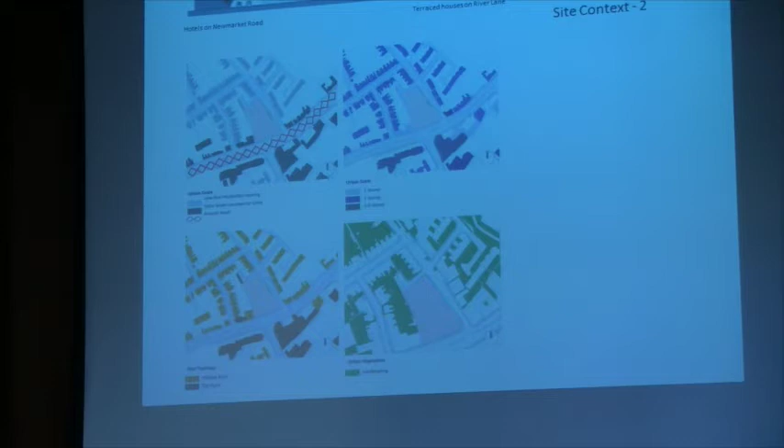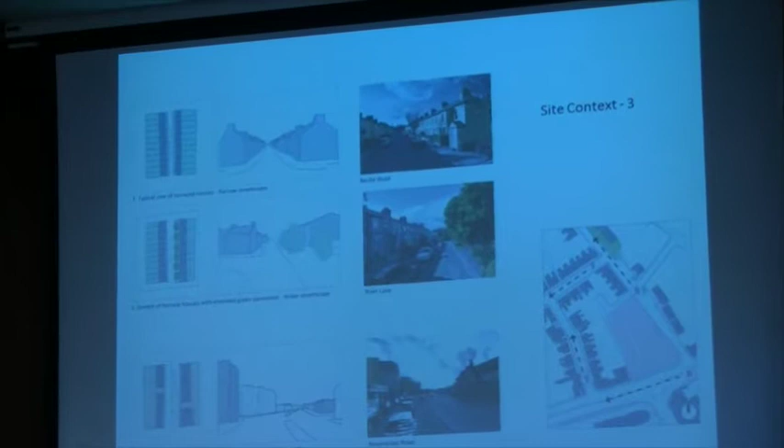One of the key features of the housing was two-storey houses, pitch roofs, front gardens with an entrance gate on the boundary. So we thought that was quite a good motif for the scheme on River Lane itself.

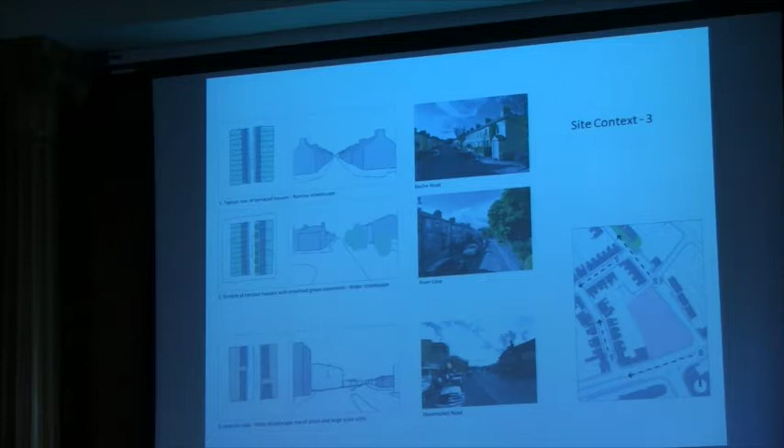The bottom end of River Lane is slightly different in that it's tree-lined. It's quite mature tree planting, as you can see, leading down to the river, which we thought would be good to move right up to Newmarket Road. On Newmarket Road the character changes completely with the hotels and more commercial uses.

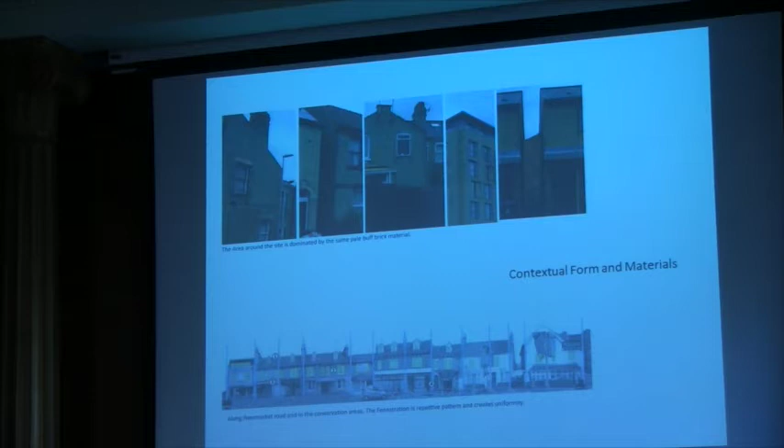That's an extract from the planning guidance. The one thing that links these quite different contexts is the material: Cambridge brick and Cambridge cream. We thought from a very early stage that we should stay with that material and allow it to link these two disparate contexts.

The other main points we tried to respond to in developing the design: we thought the building mass should be split up. This enabled us to respond to the changes in site levels, because the site drops. The high point is up here, and it drops about 600 to 700 mil, over half a metre, down to the bottom end of the site. Splitting it up allows us to push the building down.

It also allows the feel of these two blocks to be quite separate, and for the block facing Newmarket Road to be different and respond to that context.

We're showing new planting, modifying River Lane itself to provide additional parking. We're also creating build-outs with tree planting so we can get quite large trees to carry this tree planting idea right up to the corner, because part of the planning guidance was that the corner of River Lane and Newmarket is a kind of gateway into the residential area behind the site.

Pushing the building back addresses a lot of the issues of the previous refusal. One problem was this continuous frontage being a bit dominating. Apart from the language the previous scheme used, it was too close to the pavement. Pushing it back allows us to get tree planting in the street, front gardens to each individual block, and a series of entrance gates along River Lane.

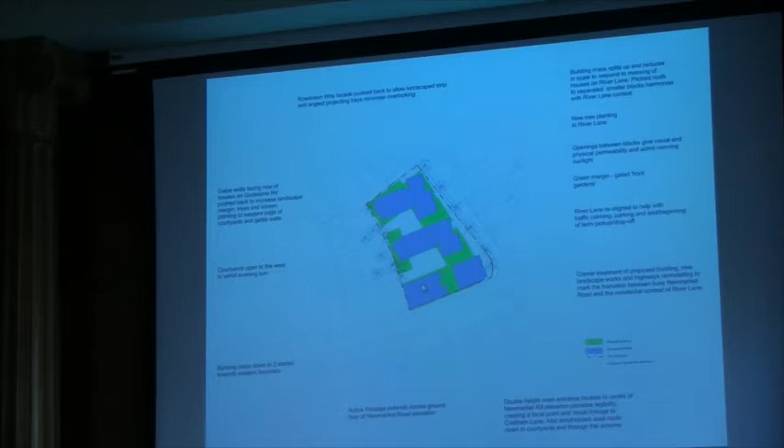At the moment there's a continuous wall - West Garage has a wall on that boundary. It varies in height, some flat parapet, some with a pitched roof, but it's basically a continuous brick wall. The previous scheme had a two-storey block that followed that boundary. We thought it would be nice to break that, to let light into these courtyards, but also to break this long brick wall in terms of residents next door.

The way we set the scheme out - this is obviously Newmarket Road. So the active frontage, we've got a management suite here, which addresses both the entrance, a double height entrance, and the corner into River Lane.

There's a student common room, which is quite a generous space for the residents, which drops down into a double height space behind, so it opens out into the courtyard. The student accommodation is arranged in these blocks served by central cores.

For refuse, we're in discussion with the designs for both cycle storage and refuse storage, and that's in development, but obviously that's an important part of the layout. At the moment we've got a large cycle store here and cycle storage spread along these routes to the main entrance doors. That's under development, so we may end up with a more centralised cycle store.

Can you go back on that slide? Yeah, if you wouldn't mind.

So the corner building has no accommodation whatsoever on the ground floor, it does above. That's because it's a really busy street here. So at the ground floor, we've just got active use - offices, reception, common room, etc., and cycle storage and bin storage on the back of that block. Above that there's residential accommodation.

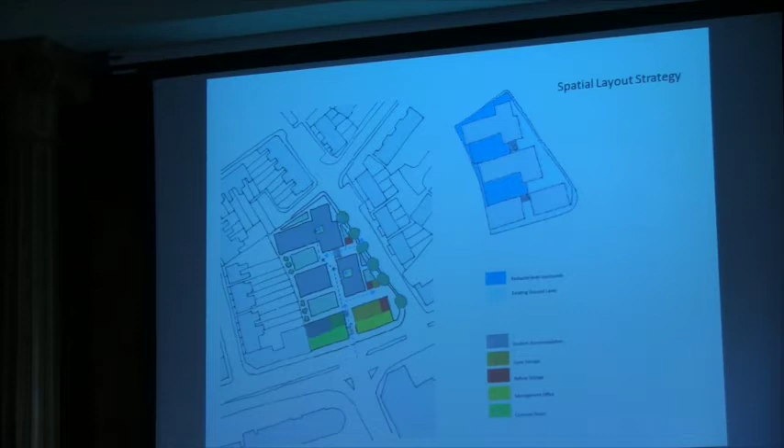That diagram shows that on the view from Coldham's Lane, we wanted to create some visual interest halfway across the block. The previous scheme came in on that corner, but we know that corner is important - we're seeing it more as a place to put public art, since it's a busy corner where cyclists and pedestrians come around. So we pull the building back to create generosity there, and also to bring tree planting right up to Newmarket Road, and place the entrance, a double height entrance, directly opposite Coldham's Lane to create this visual connection.

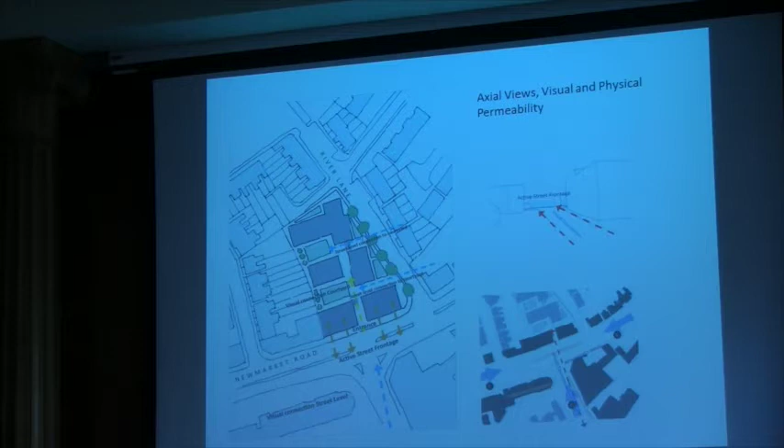Another reason for splitting the blocks up was to create more visual interest in the street, in River Lane itself. So apart from letting morning light into these courtyards, there'll be visual permeability as you're walking along the street - you'll see down into those courtyards. Similar to the previous scheme, we've actually dropped the courtyard slightly, and there's accommodation arranged around the courtyards in that way.

That's the staircase down from the main entrance, and that's the lower area of the common room, which opens out into this courtyard. Then there's a second courtyard here. The two courtyards will be given slightly different treatment - this will be the slightly busier one, opening off the common room, and then the more relaxed, more heavily planted courtyard to the north.

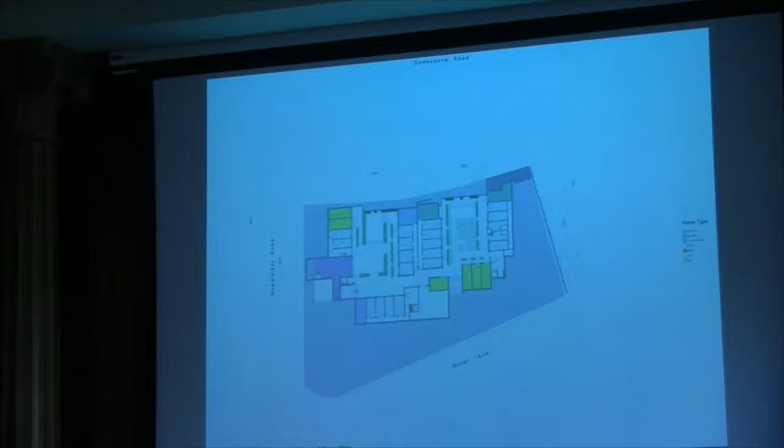That's the ground floor plan. Again, the staircase down, so a very simple, very clear circulation route through to these cores, or you can stay at ground level and come round here and get into these cores, or people can walk down River Lane and enter through the front garden, through those gates on River Lane. That's the cycle store management office in here, and the common room at ground level, looking out into Newmarket Road, which gives some activation, some life to Newmarket Road, and then student accommodation arranged in those two blocks.

These are the stores - at the moment they're cycle and refuse stores, but we might reorganise those. They'd all be part of the landscaping and have a green roof over the top.

We looked at the distances between the proposals, especially these distances at Godesdone Road, the windows that look directly facing each other - that's about 50 metres, and that's about 40 metres. So there's a good separating distance where windows face.

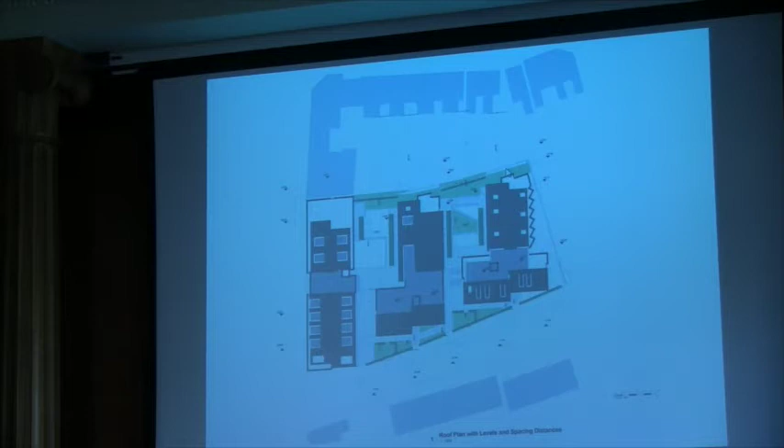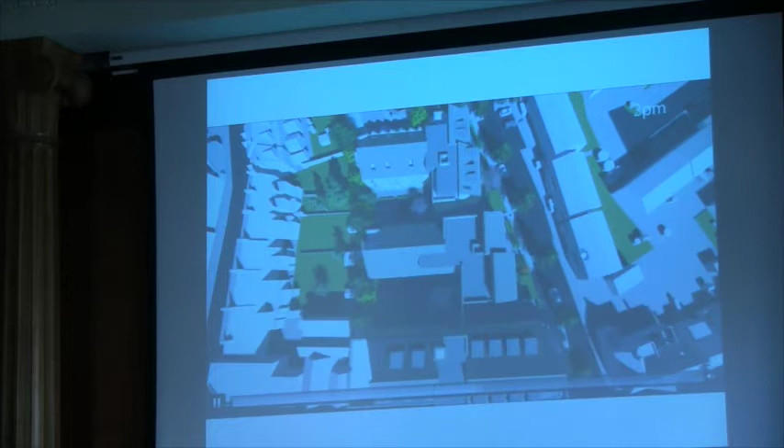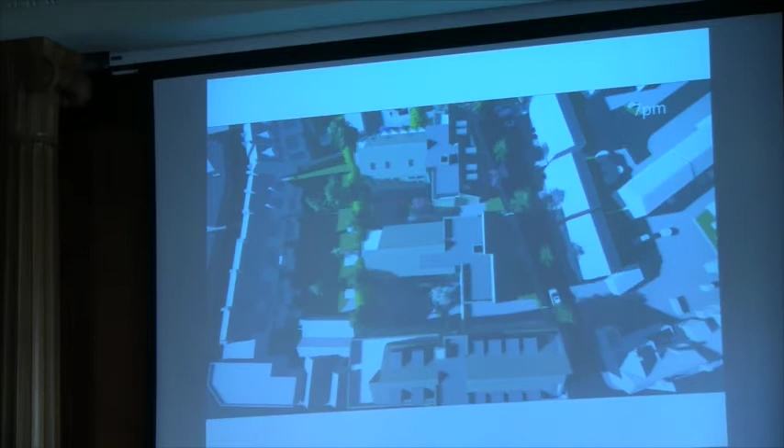And we looked at spring equinox. We know there's a particular worry for these residents here - they were concerned about shading. This one shows that by about 5 or 6 o'clock the shadows start to get a bit long. But more or less everybody's in shadow at that time of year.

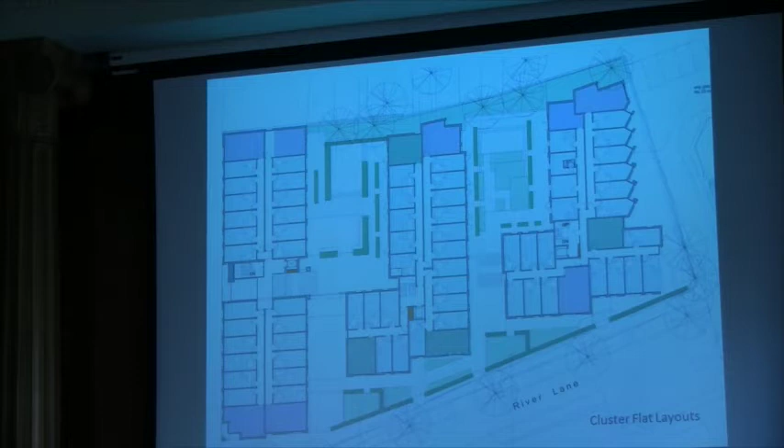The plan here is serrated to angle the view out of these rooms away from the garden of that house on River Lane.

These bedrooms—the previous scheme was criticised for very narrow bedrooms. We've got a minimum of 2.6 width on these bedrooms. There are 2 main types: this one works very well, it's a more square format, 3.4 by 4 meters. And this one is 2.6 wide. We found that to work very well in the previous schemes.

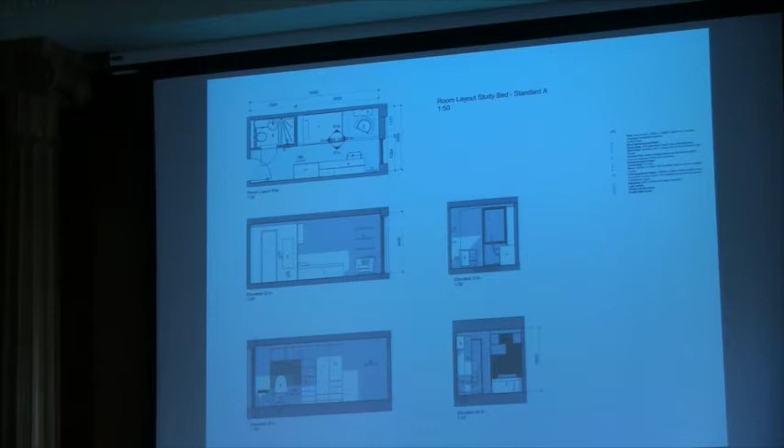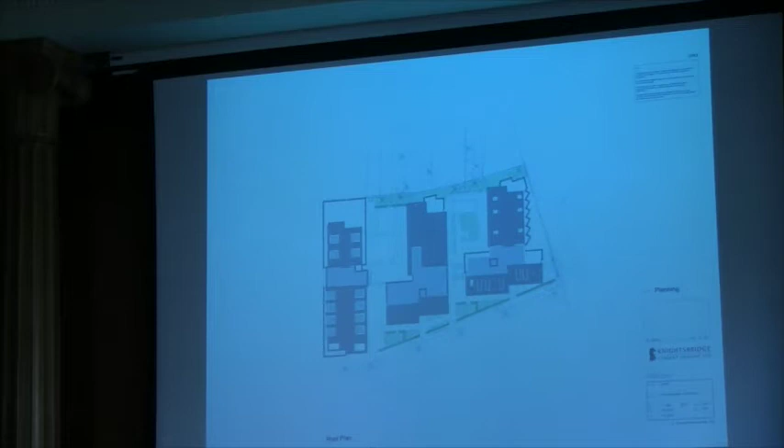2 sections through the courtyards. We've done a lot of work with local residents on the treatment of this retaining wall. We think we've found an answer that we hope suits everybody, in terms both of security from the courtyard and for tree planting and screening.

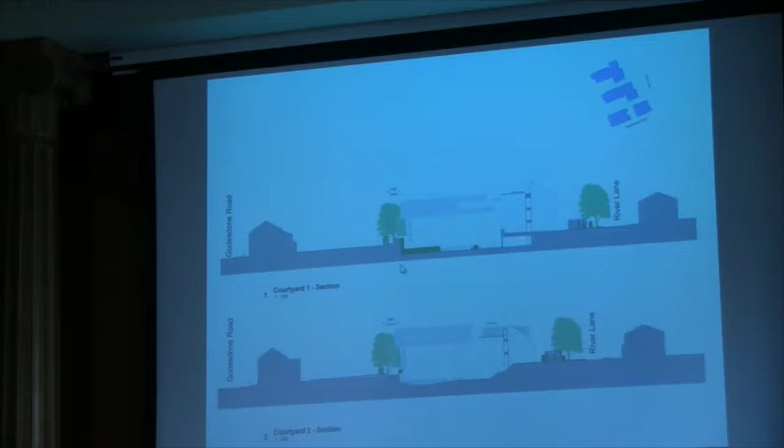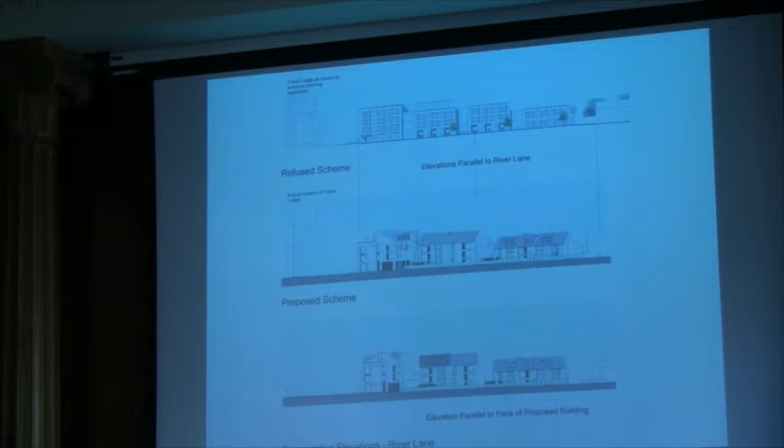We also looked carefully at a comparison between the previous scheme elevation treatments and ours. The previous scheme tried to break the massing down, but it stayed at one level, so it ended up higher than it needed to be at the north end of the site. Splitting ours pulls these heights down, and since these are pitched roofs, the effective height is 2-storey, similar to the houses next door, only stepping up as we get towards Newmarket Road.

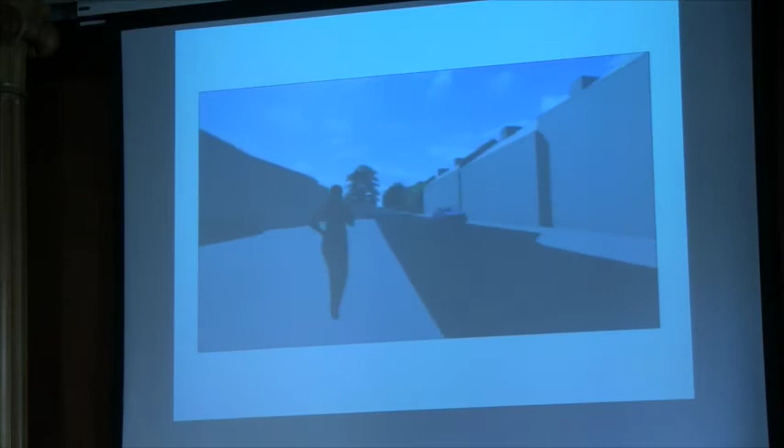So this is a walk through. We're walking up Beche Road, and up River Lane towards Newmarket Road, so you see the context of the proposals at the north end.

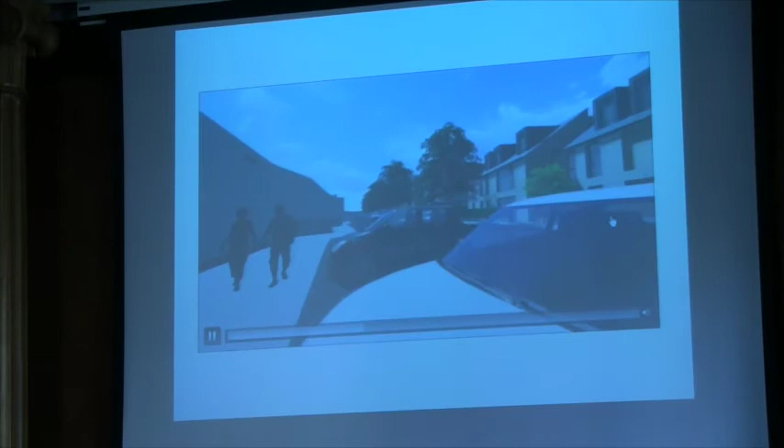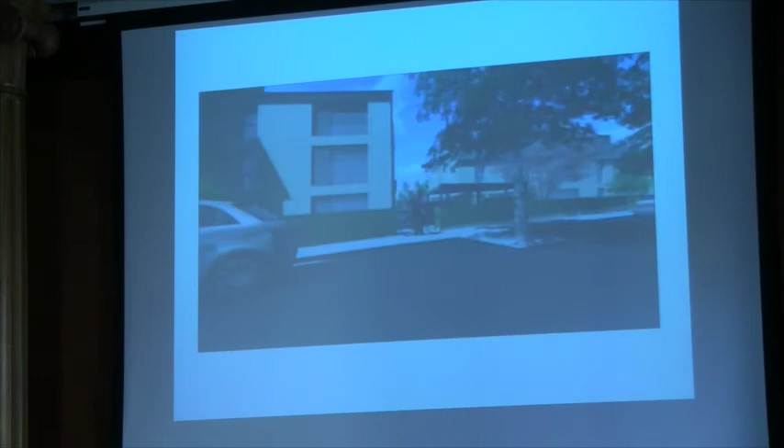We're doing these views, verified views at key points, which is what the still images are showing.

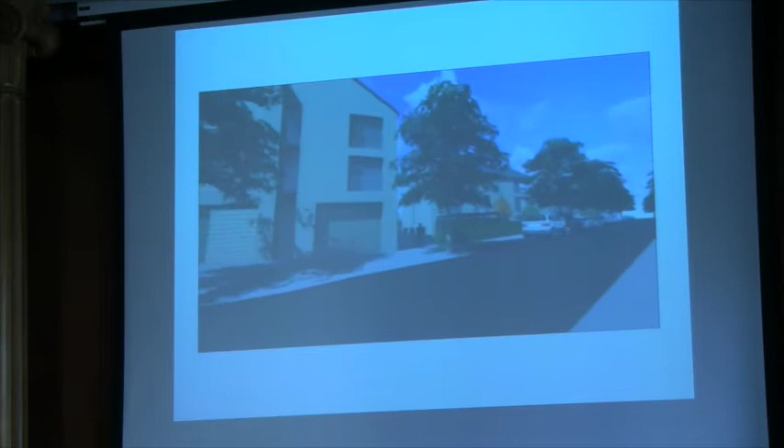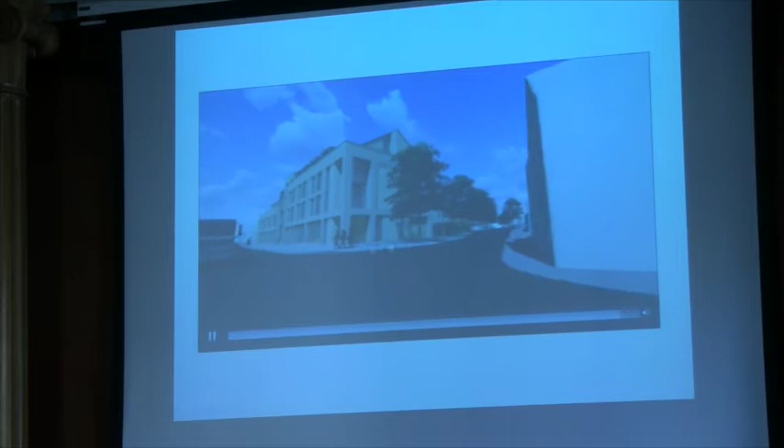So this is showing the context, the tree plantings to River Lane, the green boundary separating the buildings from the pavement, and this is the proposed corner treatment. We need to do a lot more work yet on the proposals for landscaping on that corner, but that's in development.

Then the Newmarket Road elevation—we've split the building basically. We've dropped it down to 2 stories there, and we've split it here and tried to create a really strong and legible entrance in the centre of the building.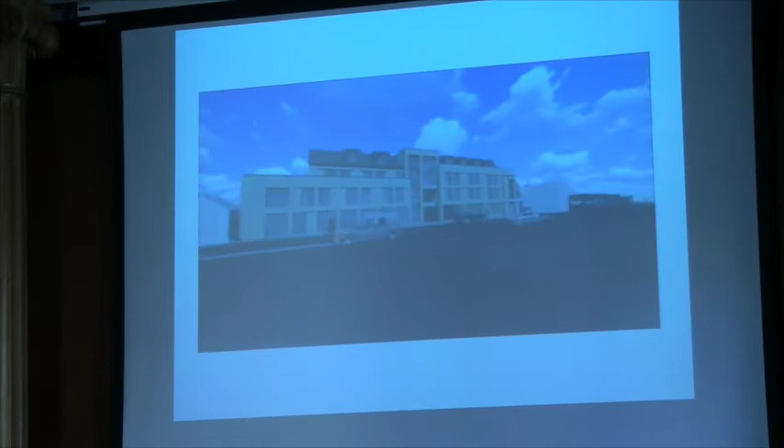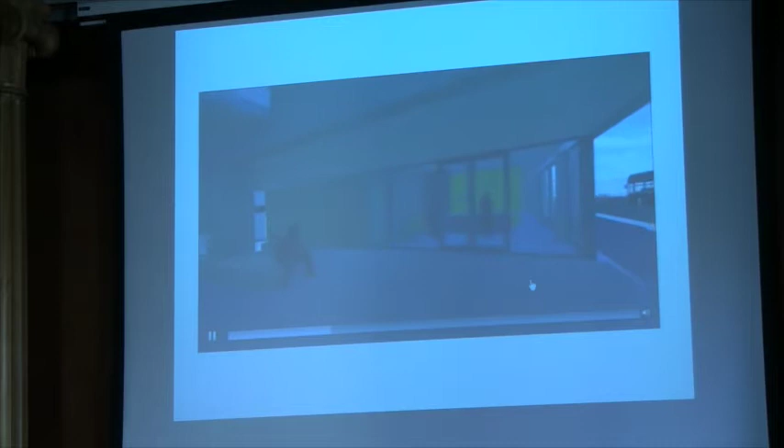The main entrance is double height with the management office here, reception effectively. But there are views from the street all the way through into the courtyard, which we think works very well. That's a bridge across the top of the first floor level, linking the residential accommodation with the circulation to the left. The lift is on your left there.

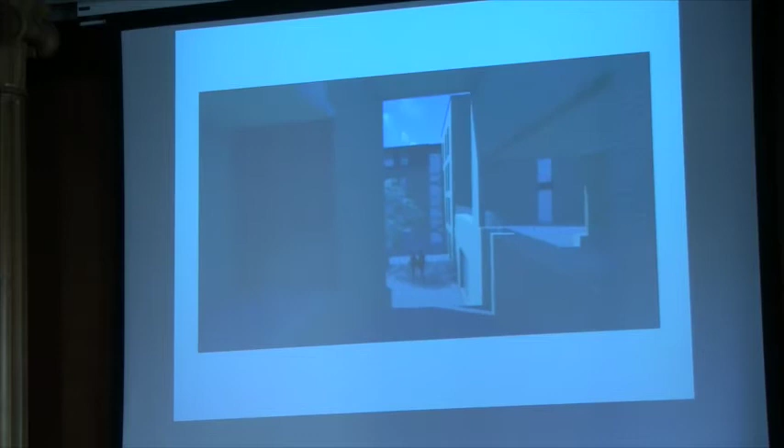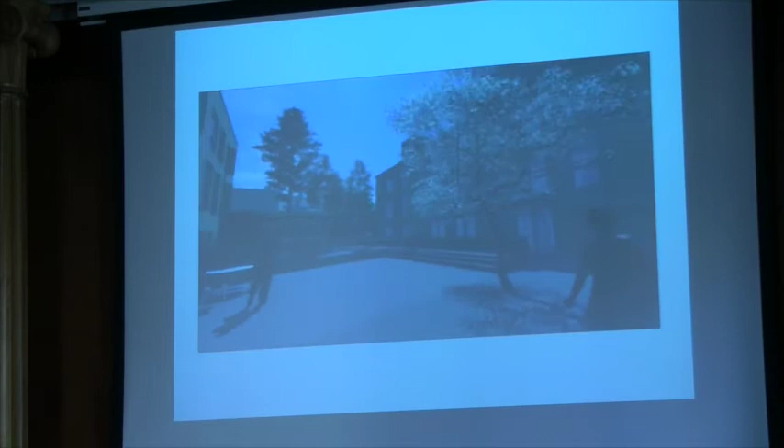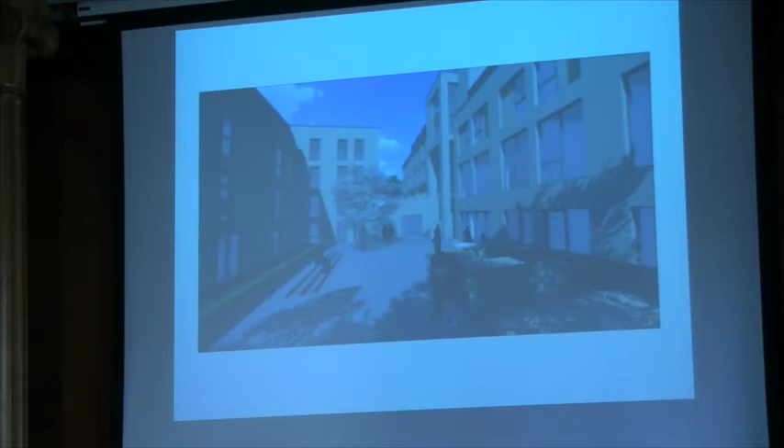So this is taking us down to the first landscaped courtyard, and then you see the proposals for the boundary. That's a retaining wall that will be heavily greened with hedging and a planting boundary. These gaps between the building allow light into these courtyards in the morning, and that works quite effectively.

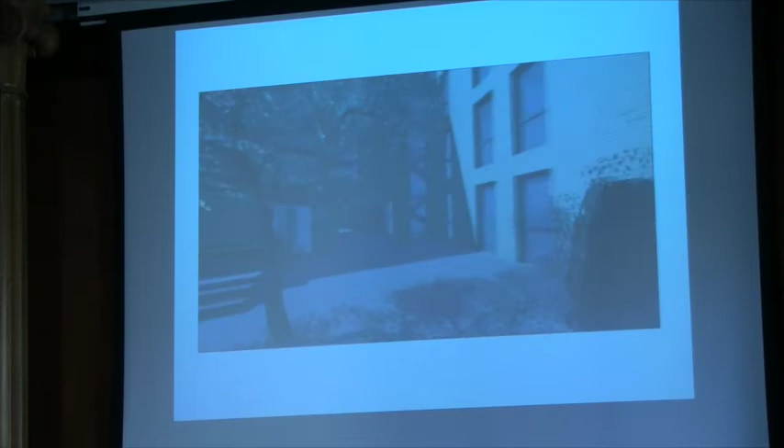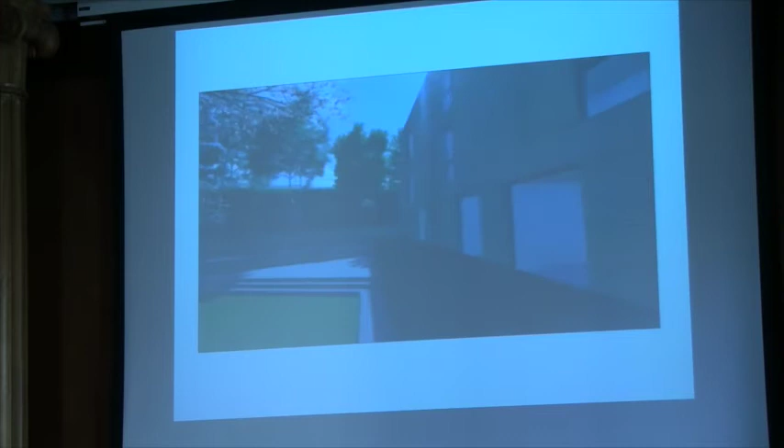So we're going through now into the northern courtyard, slightly different feel, a bit more soft landscaping, but it's similar in principle. These are 3-storey in the courtyard. To the Godstone Gardens, they're going to be 2-storey.

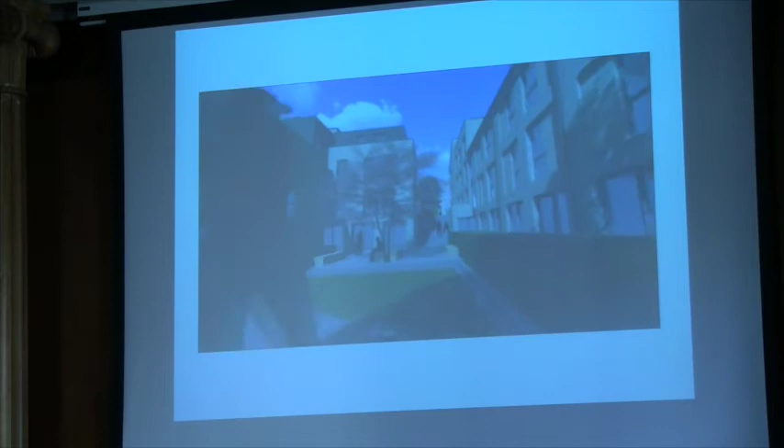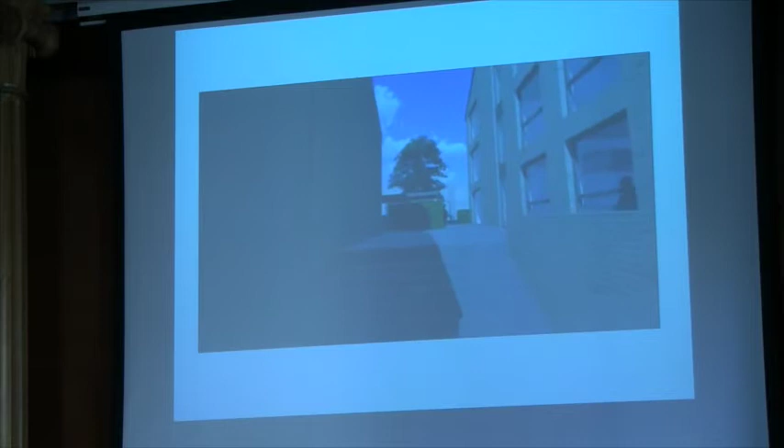Taking us back up to ground level on River Lane.

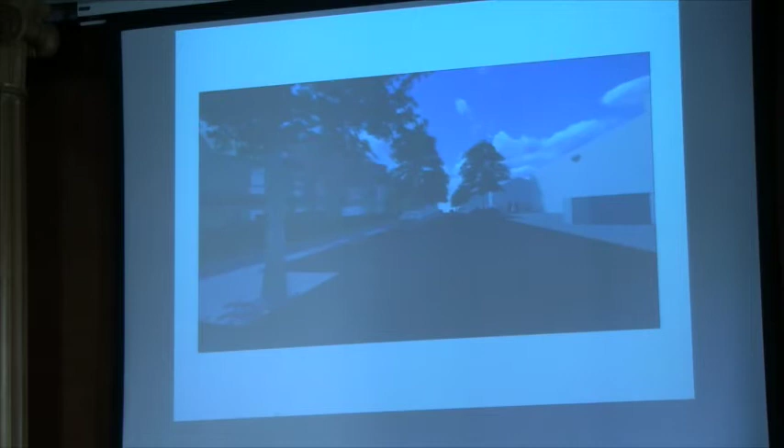And then the final walkthrough takes us down Rollington Way and looks at the views from Godstone Road Gardens. So that's the relationship between our northernmost block and the adjacent house.

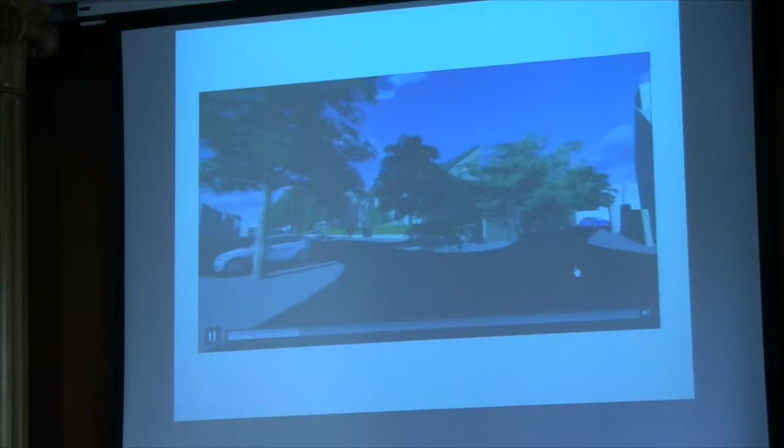These are two retained cherry trees. They're actually outside our site, so we're proposing to protect those during the work, and they'll be retained. And there are the angled windows preventing direct views into the garden next door.

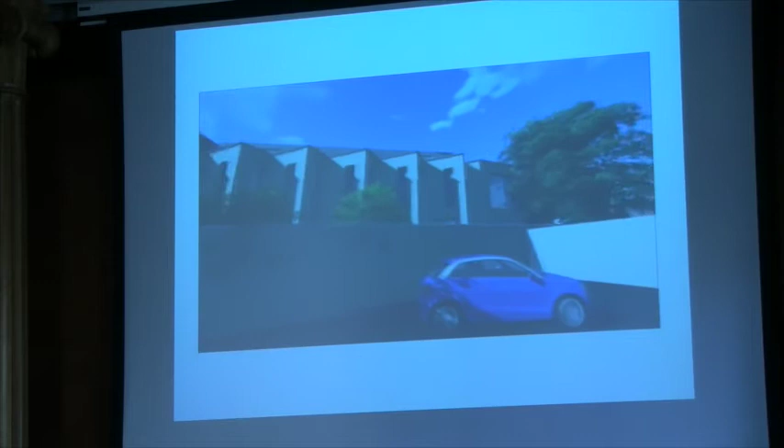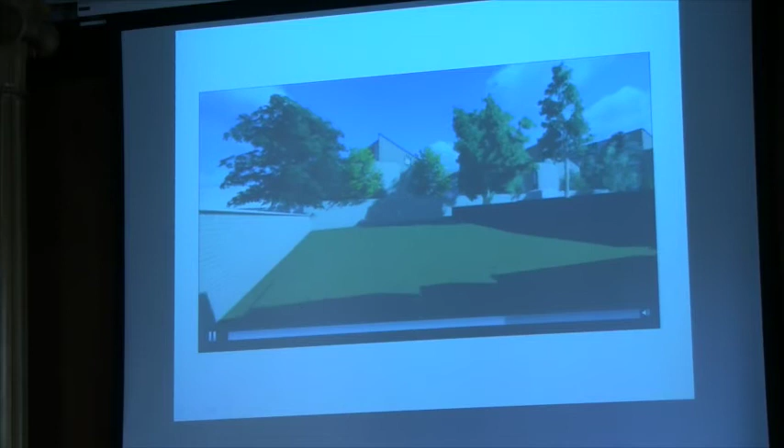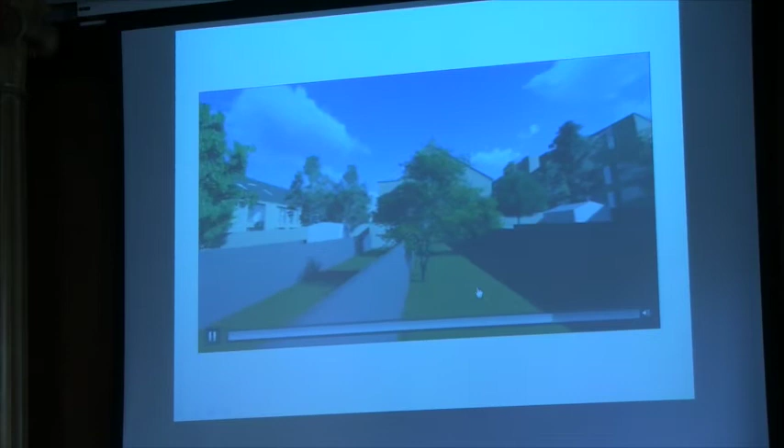Then hopping over the garages, walking through the gardens, we're looking east. So there are the gables, courtyards in between, and screen planting. Some of these trees are existing, large sycamores, and some trees behind the boundary are new trees, planted at around 6 metres from the outset and growing to about 9 metres.

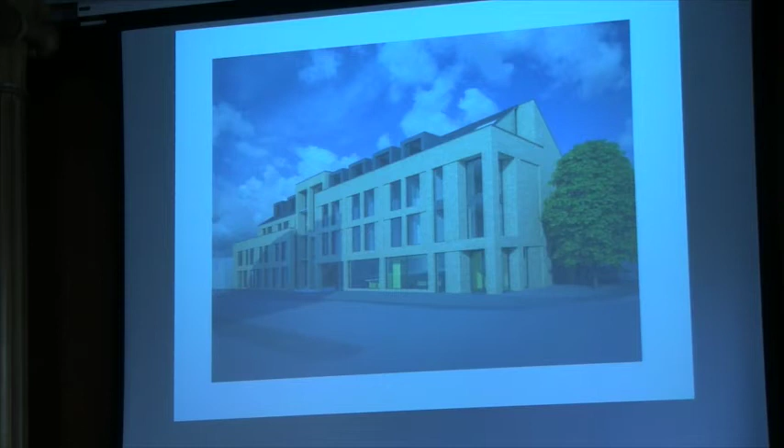And that's just the view from Newmarket Road. And that's where we are so far in terms of the design of the building.

So, can we see this on? Yeah. Oh, sorry. Sure. Thank you, Paul. I just wanted to mention just a few other considerations, just by way of background information.

This is a quote: developers consulted us to take on board our comments and advice. The scheme compares favourably with other recent development schemes here in Cambridge and elsewhere. The applicant is committed to providing a Section 106 agreement, which will ensure that the use restrictions, which are pretty standard, are imposed as part of this scheme.

But the intention at this stage is for ARU to be the occupied development. The scheme has been considered at the Design and Conservation Panel at its pre-application stage. The emerging scheme was presented and it received 6 ambers and 2 greens, with the panel commenting this scheme has improved significantly from its previous iterations.